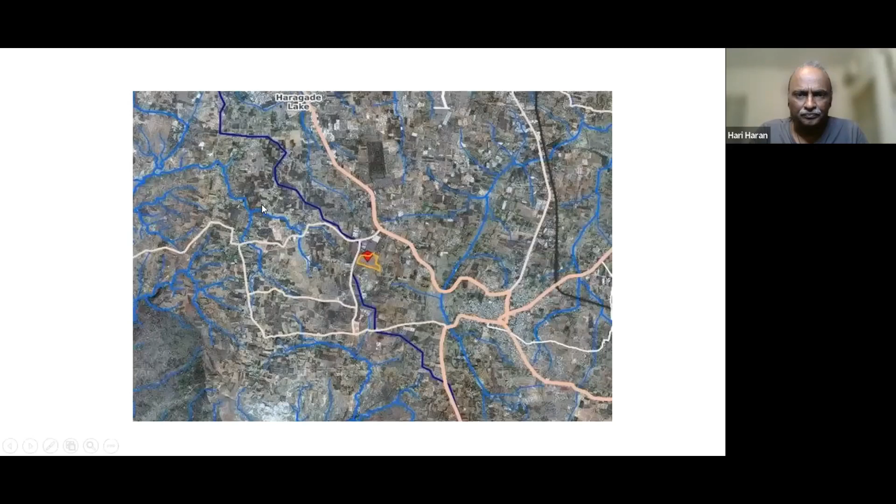Instead, if that engineer is trained to look at how you can harvest that water sensibly, while you also mitigate the threat of floods or inundation, great, you got a double gain that you have secured. Look at how it works, okay? Now, this is one example I take of a land of about 27 to 30 acres. Well, I will say 27 acres because that's the actual area of the land. This is to the south of the city called Bangalore.

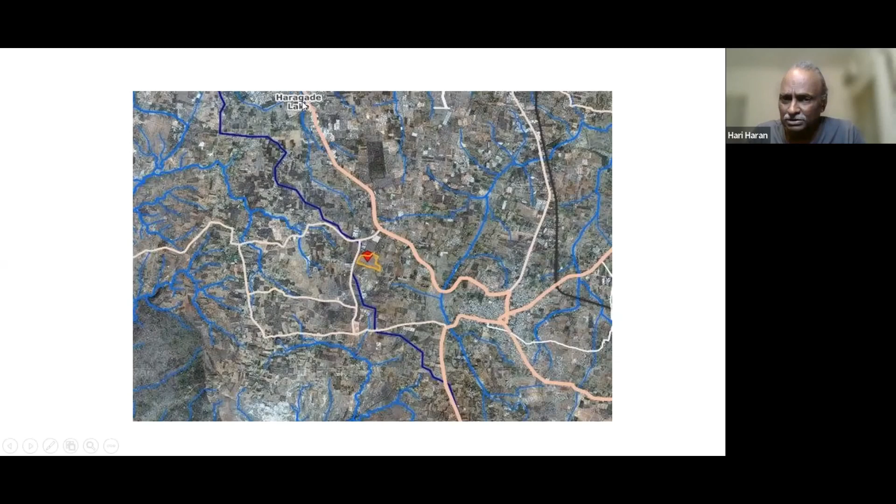And the scale of this map is that from this center where the land is located to the north where you see this lake, it's a distance of about 7 kilometers. That is the scale of this map. Now, what we did is zoom down to show you the veins. The darker blue veins are lines of the ridge. That is, both sides, the land contours in a way that water is flowing in on those ridges.

Now, don't take this seriously. When I say a ridge, it needn't necessarily be something that is this sharp. It could be a gentle undulation of the land, and over 1,000 years, 5,000 years, water has found ways of moving across those regions. Now, what has happened to cities is that other developments have come, buildings have been put up in those places. Sometimes, veins like these or channels like these have been sort of blocked with buildings that have been put up. People don't understand what that means. Legislation does not recognize these things sometimes.

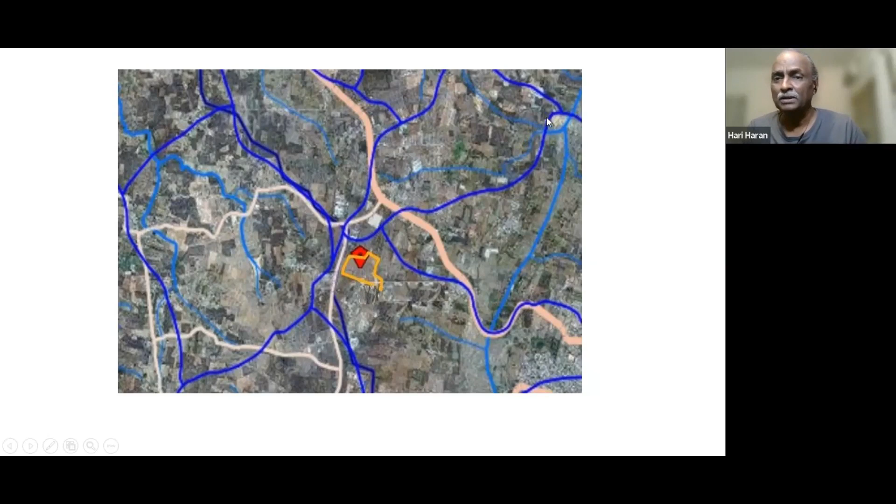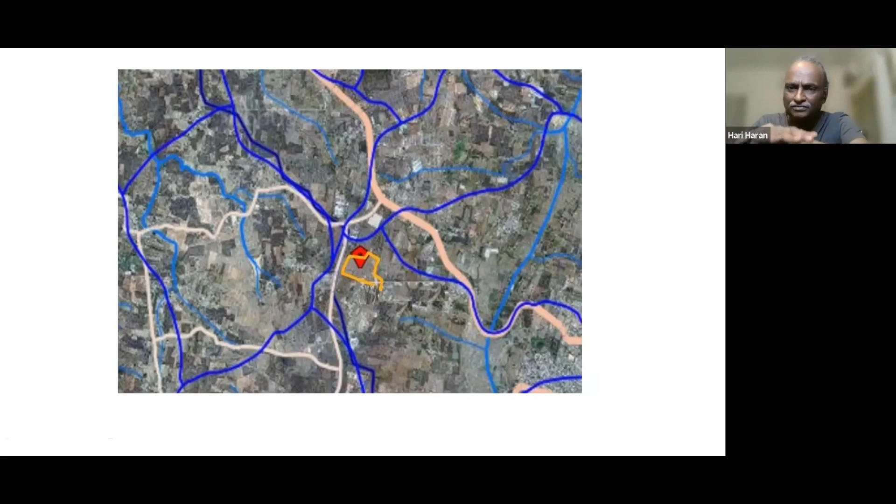And therefore, if you look at a contour of this kind in a satellite map, you recognize for yourself what those natural contours and ridges were. And what does it tell you? If the land is therefore contouring down this side or to the other side on the left of this map, you will see that this land is sitting on a slight crest with both sides tapering off. We looked at this land one day, maybe a year ago, and then we came back to understanding what this means in terms of this beautiful connect that nature provides between soil and water and rock and the subterraneous, shall we say, strata of soil itself.

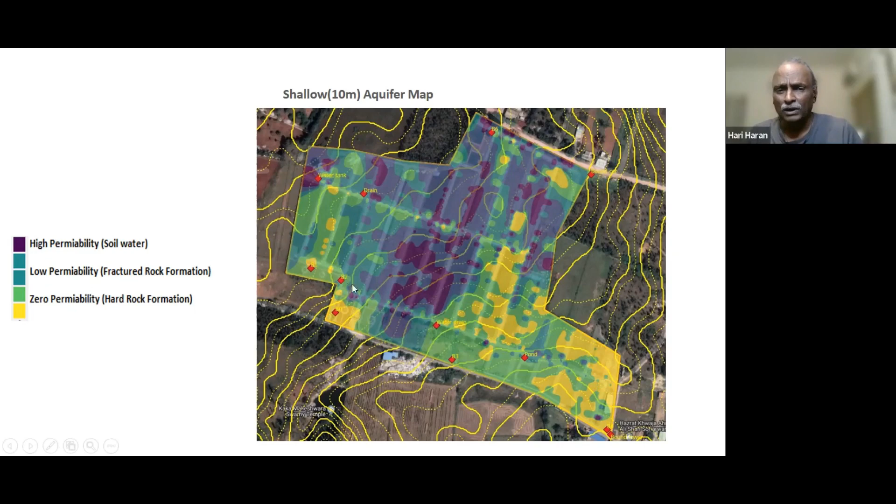Eventually, when they found these 2 borewells to the south here, which was yielding just that bit of water, between them about 25,000 liters of water, they said, okay, we will continue to keep the pump here. And they did not commission or install pumps in the other 9. Well, in one of them, the third pump, they did install a pump, and the pump is around. They wasted money on it, but there is no water to come. So what did they do, or what did we do?

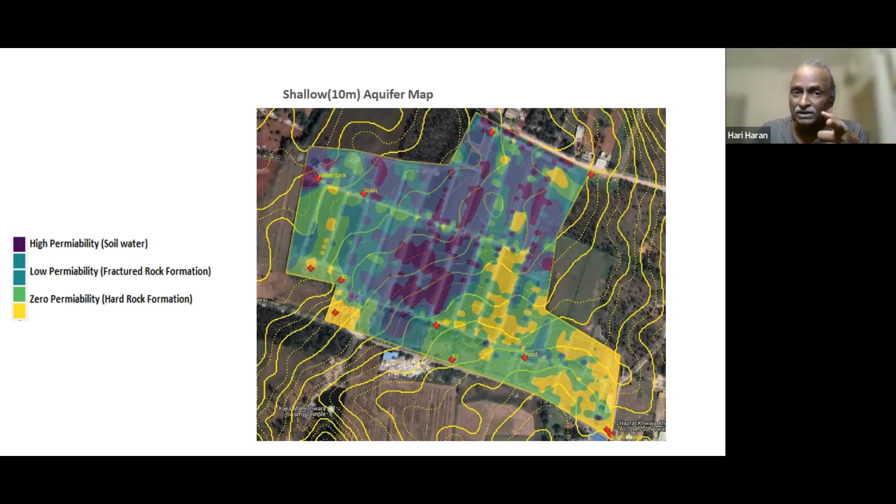After understanding this at 10 meters below the soil, we looked at what it means in terms of, again, those resistivity tests. Check out what a resistivity test is and how it is conducted. And what does that mean for you to analyze the availability of water in a land? You could do this for a city, by the way. This is sometimes called a heat map, for you to know where water lies and for you to know where water does not lie.

If these 2 borewells were actually working and yielding a bit of water, it was thanks to the contour and what water was yielded by the surface of the lands here, and not because of anything around the rock sheet itself. Interesting, right? Now, how data of this kind can help you make a rational scientific decision in such water sourcing is what this is about.

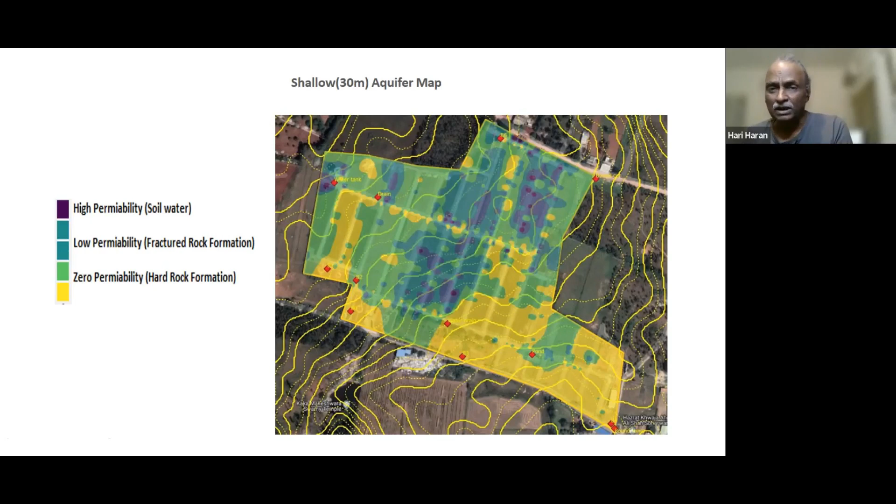We also remembered that these 2 borewells were yielding, but we wanted to tell ourselves, no way are we going to have borewells used anymore. We said we are going to find water in this place without borewells and without tankers importing water to this piece of land, to this campus, to this project. It's a residential campus. Let me now say this. It's a residential campus of about 500 homes.

The challenge was formidable. 500 homes, even at about 600 liters to a house, was 300,000 or 3 lakh liters per day of water demand. So how do we solve this was one of the challenges that we had to look at. Then we found this pond there. This pond was at this place. You can see pond written here in yellow. And this is where this pond was.

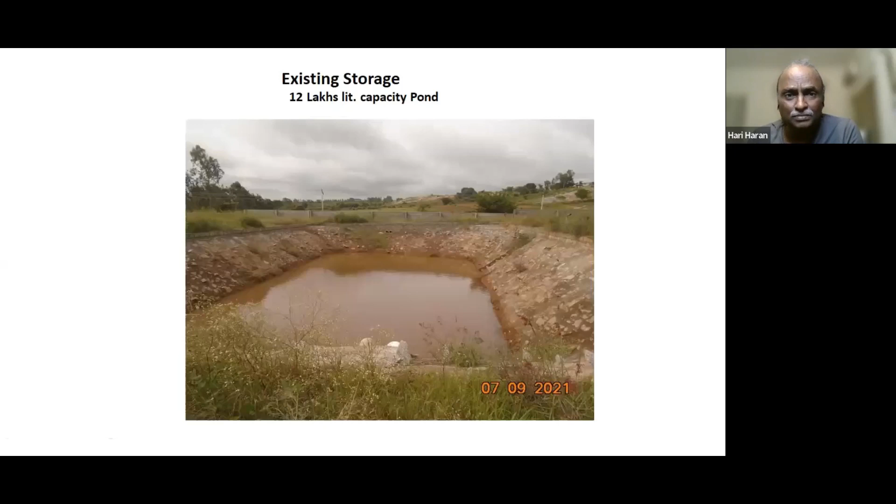Then we said, well, we'll work out the mechanical engineering aspects of it. We worked out the total head, as I said, from that point to here, it was about 37.54 meters because of the vertical. This is a part I'm not going to explain in this module, but for every 10 meters of horizontal travel, it's 1 vertical meter for reckoning for pumping purposes.

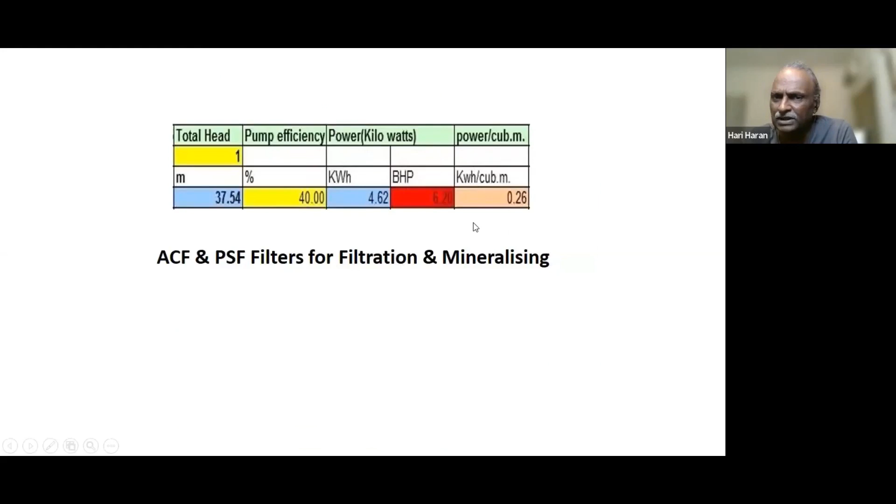Now, if you have to work out the size of the pump and the efficiency of the pump, you also have to take into account friction losses, which come with bends and turns in pipes that you have in a layout or an enclave of this kind. So we said we'll have to work these out. We worked out the pumping capacities that were needed, and that's part of a story I'll have to tell you another time.

Then we looked at that same space. You can look at this pond here now. I've zoomed in here, and then we said, apart from this 12 lakh liters, here we could possibly create one more storage capacity of about 6 lakh liters. Then we said, hang on, what do we have currently on the campus as storage capacity?

We found at B4 there was a sewage treatment plant that had been created, not functional yet because the project is still underway. And we found that it could hold about 8.5 lakh liters of water temporarily for 2 or 3 years, until the entire campus was alive, many people had built their homes, and the wastewater had to be treated in that STP. And that is 3 years away from now. Therefore, we said we will use that 8.5 lakh liters for storing treated water.

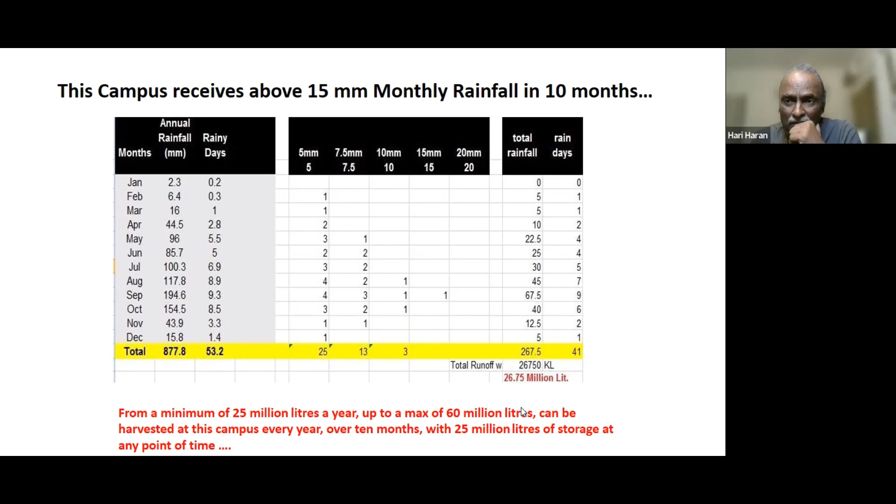Now, every 10 mm of rainfall is approximately 40,000 liters to an acre. We have 27 acres. Knock, say, 7 acres out and think only 20 acres. 40,000 into 20 acres is 8 lakh liters of water that this land gets every time it rains just 10 mm.

Now, how much is 10 mm? It is something that you can understand if you get to see a rain gauge. Find out in your city where a rain gauge is. Ask those guys out there, or look at a website and see how a rain gauge measures the rain that actually falls on that region.

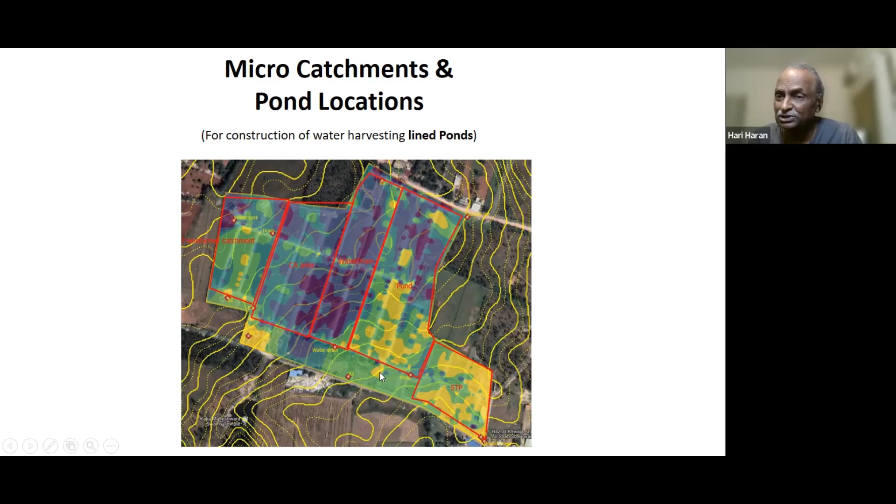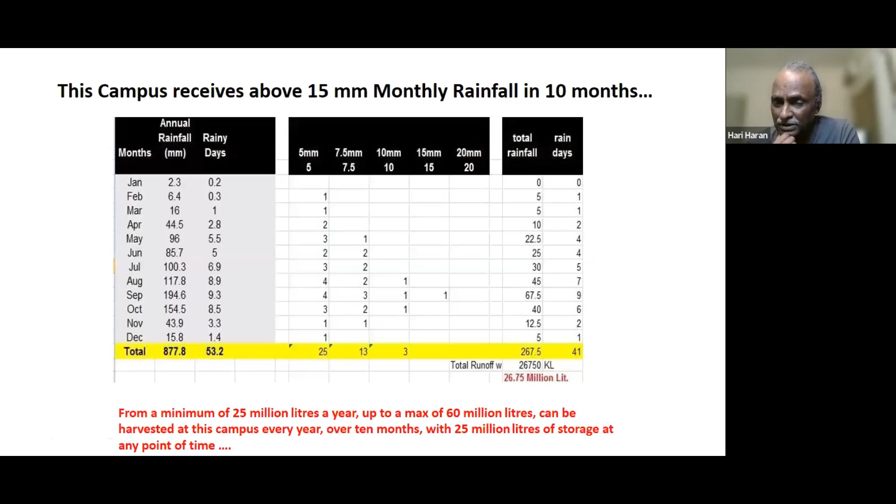And therefore, we found that on this entire land, just a 10 mm fall of rain means that we can capture as much as 8 lakh liters. The story was built. The story was exciting for us. This took us about 5 months to understand, to come to this point.

And then we said we will do multiple sets of interventions of this kind. Now, if you read about watersheds, you will find that these are all basic technologies or systems that have been in use in this country for 2000 years. You can go to Rajasthan and western interior parts of Kutch, Kathiawar in Gujarat, and you will find systems like these have been in use for 2000 years. In fact, deep south in parts of Tamil Nadu, from the time of the Cholas, about 900 AD to 1100, 1200 AD, systems like these have been prevalent.

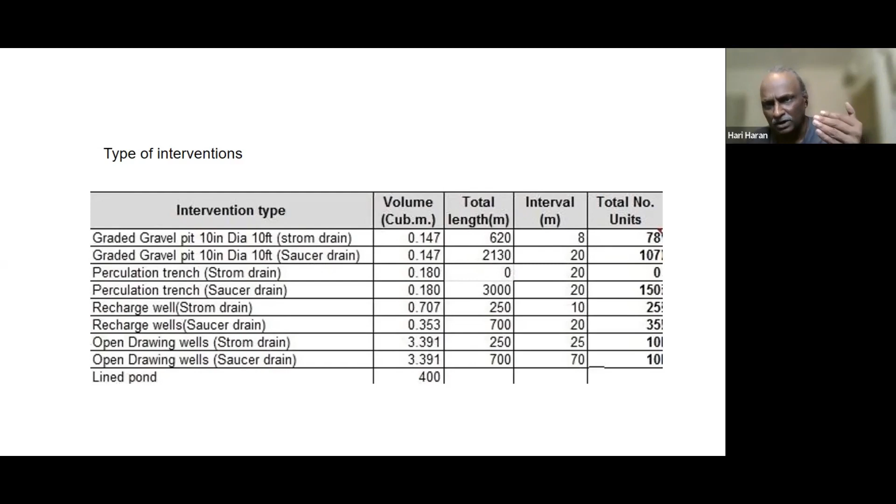Now, we are not doing anything new. We are learning from traditional knowledge systems and employing a little bit of contemporary engineering understanding to bring such interventions. The other things not mentioned here are little bunds that you do, little revetments that you create. These are systems that are available, nothing new. You have to go beyond the modules and beyond what we explain in this capsule. Understand it. Look for information like that.

Well, I think you understand well that this is level 1 of the program. If you do want to know more and want to move to level 2, you could do more with the foundation and with Foundation Green as a program.

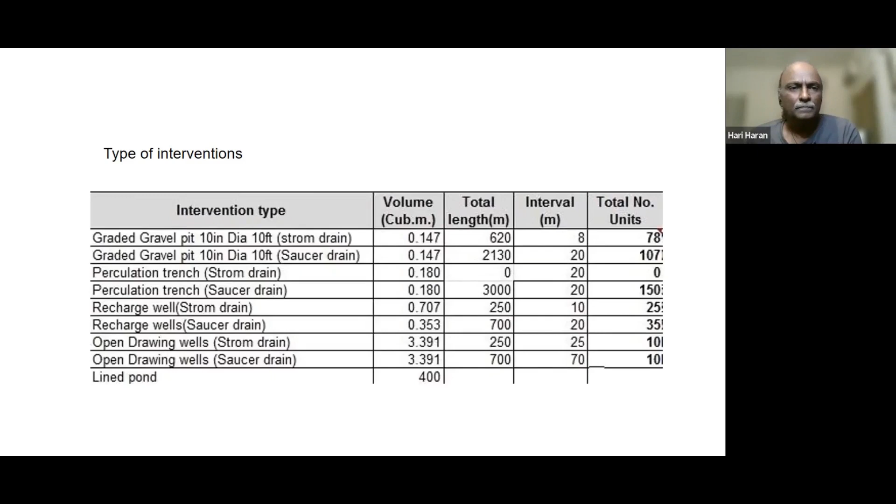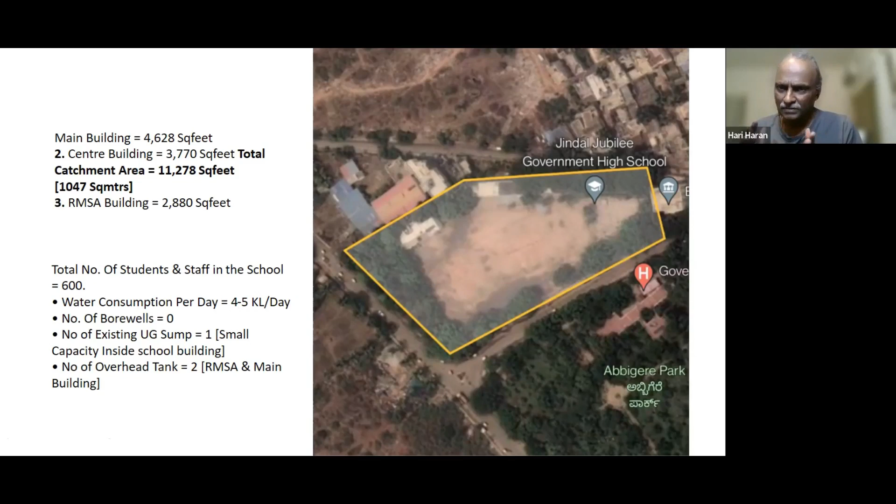Consumption per day was at about 4 to 5 kiloliters a day, that's 4 to 5,000 liters a day. There were no borewells, 0 borewells. Then there was an existing underground sump tank, a small one. And we said, okay, there was an overhead tank. There were 2 overhead tanks, as a matter of fact. And then we said, if this is what the school has got, how can I now make this school water neutral or water positive? And we came up with solutions after that.

Similarly, this is an enclave in Hyderabad. It has about 24 homes, large villas, and 100% of their water has been imported for the last 10 years. This campus was created sometime, I think in 2012, about 10 years ago. This cost them every year about 13 lakh rupees, even if you assumed only 100 rupees per 1,000 liters, 13 million liters are being purchased from outside to feed water to this campus.

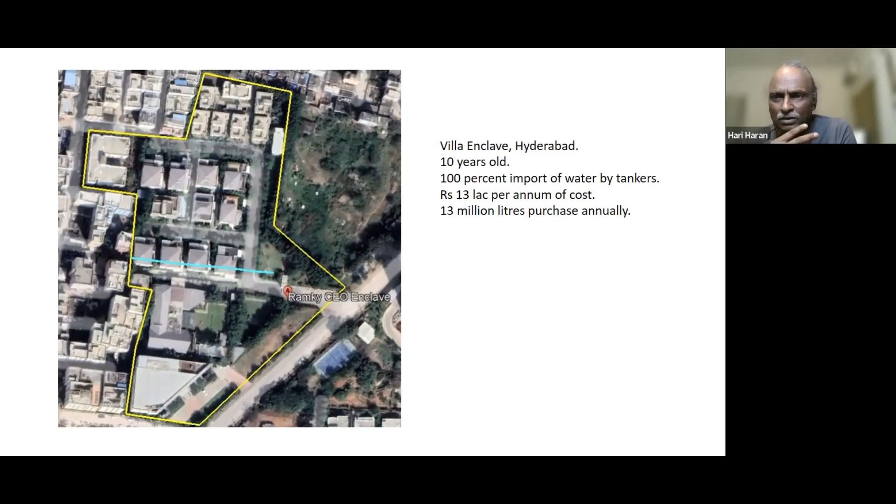Then they came to us and said, sir, this is our challenge. What can you do to make our campus net zero? This is the first time I'm talking to you about net zero water, and there is a whole basic process that this series of modules is seeking to explain to you. And so what we did is we looked at how to do a simple, basic water audit of the various points of consumption on the enclave and came up with this.

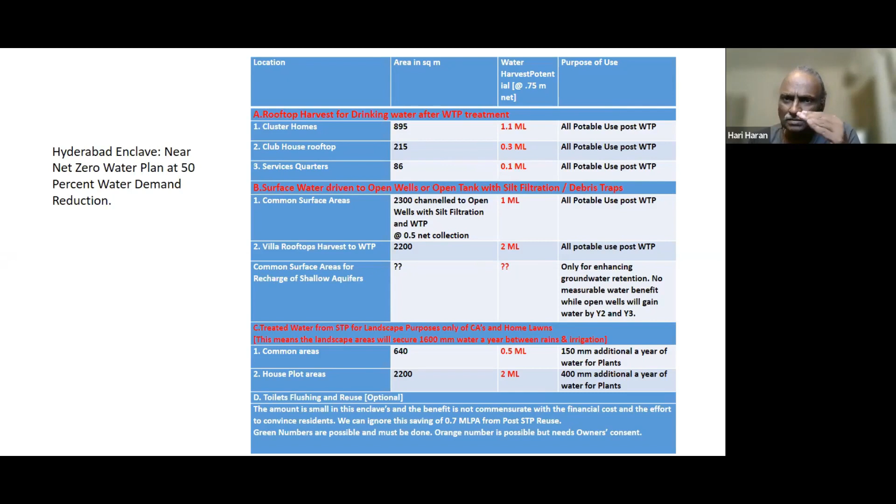We came up with the multiple usage points, cluster homes, a clubhouse that had some rooftops. There was a services quarters, and some common surface areas like roads and paved walkway areas and so on. And then there was, of course, the villas themselves and the rooftop harvest you could do there. For you to understand and work a matrix of this kind of water solutions for a campus, it will take you at least level 3 of this program. But this is illustrative of how you can break this down and explain to the water user or customer or client how they could save in each of these areas.

Simply the water from the skies. Look at this third column. It talks about water harvest potential at 0.75, that is, we take only 75% of the rain that falls as a matter of caution. With all those conservative measures and numbers, we found that we could collect about 1.5 million liters per annum from just this segment. And then in the second segment, we found that we could collect as much as 3 million liters of water for drinking.

Remember that figure I told you about? Every year they are spending about 13 lakh rupees between all these homes for purchase of water. If they did all of these things, they will get to about 70% of that 13 lakhs being saved. That's 9 lakh rupees you can save year after year by simply putting in some very basic interventions. Of course they cost a little money, but that money can be recovered within a year, maybe a year and a half.

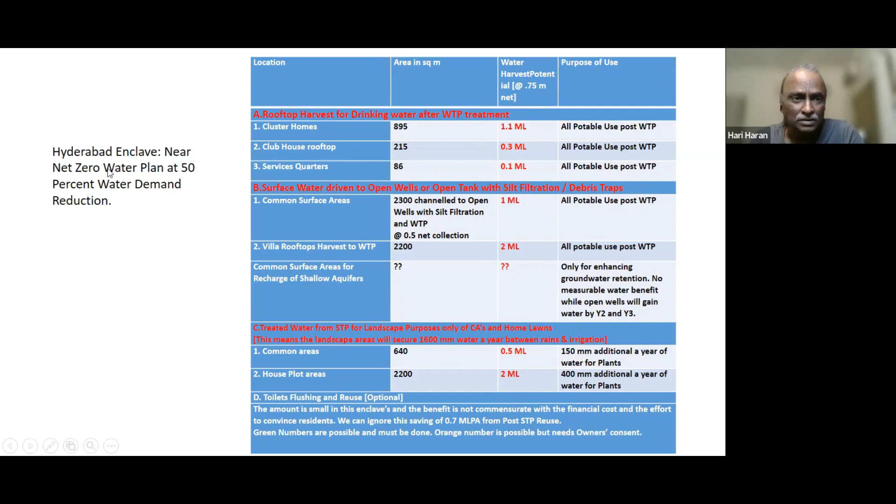And that was the interesting part of it all. You can see on the left that although these numbers suggest we could get about 75% of the water requirement, we told ourselves cautiously that we will look for only 50% reduction in water demand, because a lot of it depends on the water user. If they are responsible on maintenance, if they take care of the systems we put in place, and if the rains behave and at least match the projections we have made for this campus in Hyderabad, we can achieve it.

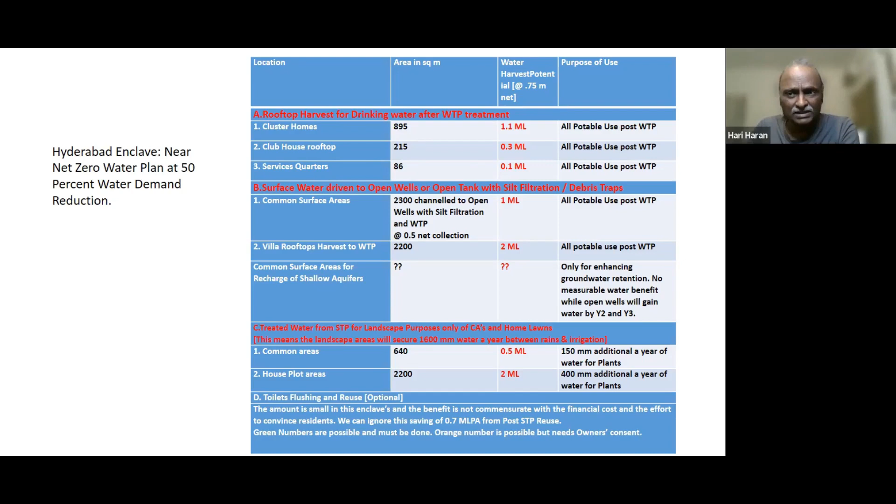So it's not simply the technology or the expertise that you bring as a water professional. It also has to do with how the rains will behave into the year next and the year after, along with the behavior of the water users in terms of being responsible about how they manage the system. We are not talking about reducing water consumption, we're talking about managing the systems. That combination will make for effective net zero water.

Questions for you all. How can you look at your city and find from the web what the monthly rainfall table of your city is? You could be from Durgapur, Rourkela, Guna in Madhya Pradesh, or anywhere, and you will find, trust me, the rainfall table for your city. If you don't find it on the web, if you're too small a town, maybe you will find it from somebody in the municipal authority in your town or city.

How much water potentially falls on an acre of land at 1 meter of annual rainfall? Work that out. That's part of the questions that will come up on the Google form for you to respond to, and you will be evaluated on the basis of your responses to those questions based on this module's presentation.

Third bullet: I'm asking you a very basic question. Let's say you had only 100 square meters, approximately 1,000 square feet, of a rooftop of your house. How much can you harvest in a year in your city?

Why am I saying in your city? Because between city to city, region to region, the rainfall pattern varies. In Bombay I get 2,500 mm rainfall, but in Bangalore I get only 1,000 mm rainfall. But in Bangalore that 1,000 mm is spread over 10 months, while in Bombay I get it spread over only 4 months. So how does the challenge change in terms of how you store or deploy water and distribute it through the rest of the year? That is also part of such water management and development.

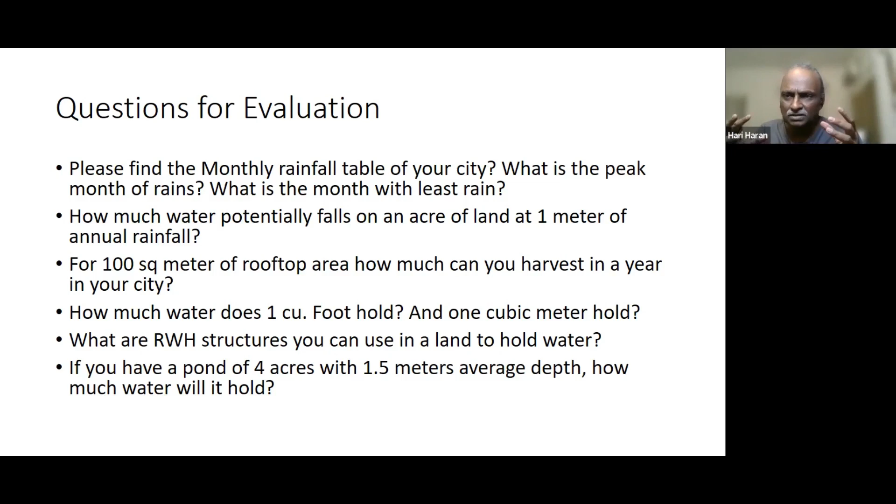If you answer those questions, and if you slowly begin to understand what the numbers mean, you will progress into making yourself a smart water professional sometime soon. Cheers, look forward to the next module and meeting you soon. Thank you.